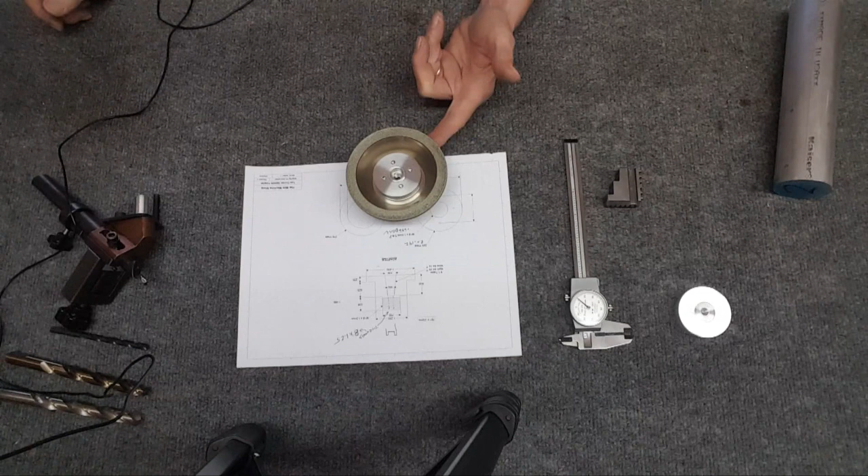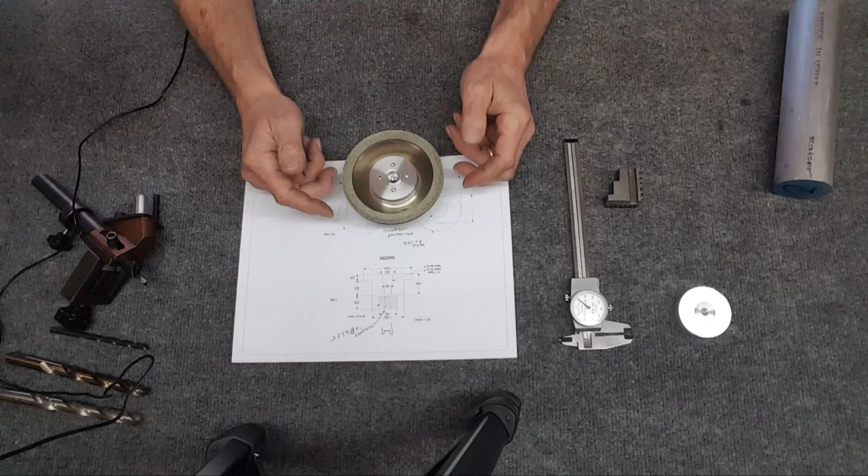Like I said in the past video, these little guys, the 100 millimeter wheels with the 20mm bore on them, hole back here, are everywhere. This is a diamond wheel, ran $20. I just found on Amazon an aluminum oxide wheel, 20mm hole, $11 prime. So the decision is I can either buy these wheels and bore them all out for 1 1/4 inches, or I can go through the painstaking process of trying to make an adapter, which this one is.

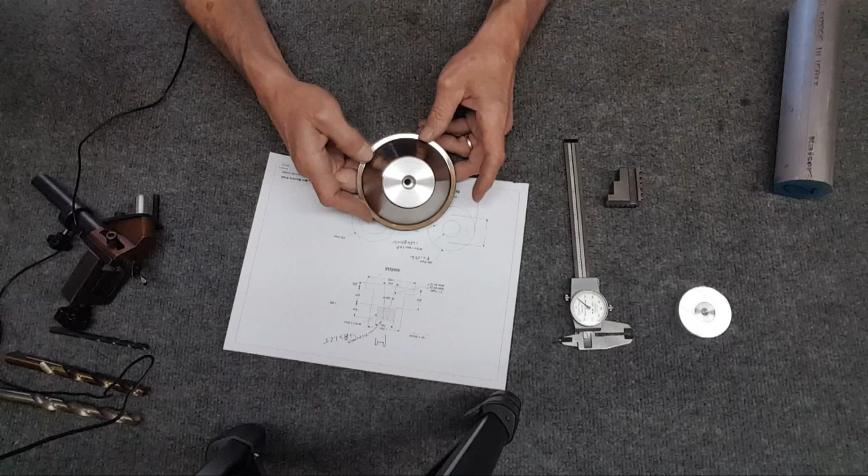What is this wheel? This is Diamond CBN, 200 grit, cubic boron nitride. If you want to take high-speed steel down, this takes it down really quick. Drill bits, as you can see - I'm not even going to get into that yet, that's a nightmare in my opinion. But a drill bit just goes right into it and disappears. No heat, doesn't turn blue. So I decided here, obviously, to try to make an adapter.

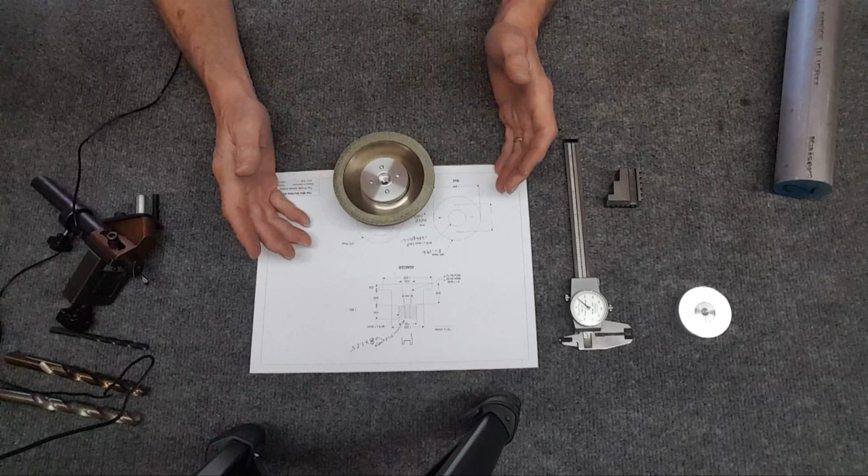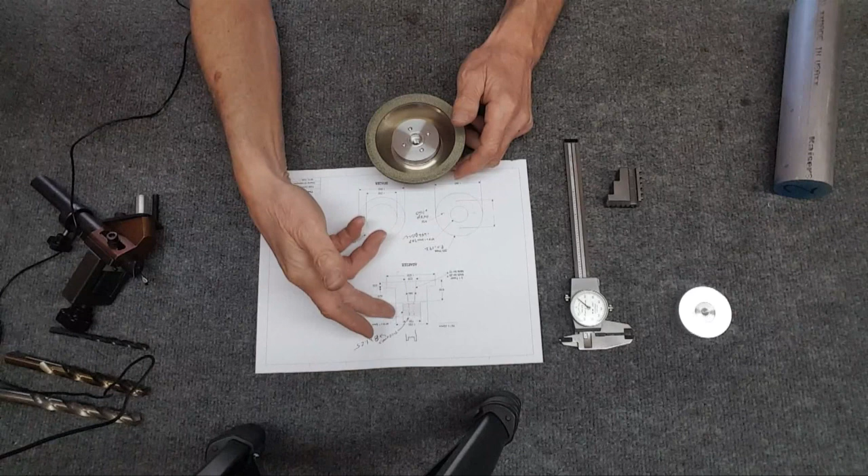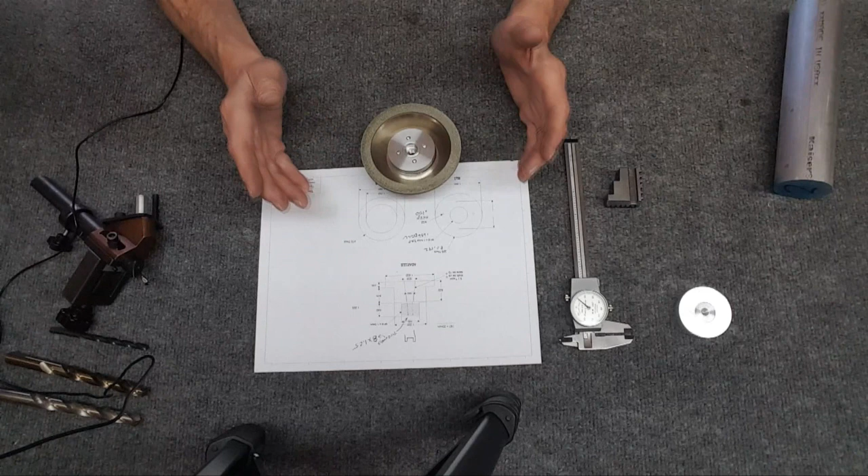The problem was I couldn't figure out how to make it in one piece. In other words, never take it out of the chuck, so I know it's absolutely true. So this one, I wound up chucking it this way and turned down this face, turned this down, turned this, threaded it. eBay had the threading die for here, 8mm, at $10, and it also had the tap to make this nut, another $10. So I'm in it like $20 for tools, but TouchDRO did a nice job in the hole circle function. That was great. So you can see I kind of added some material as I built this thing to the print. Pretty confident that the print is correct.

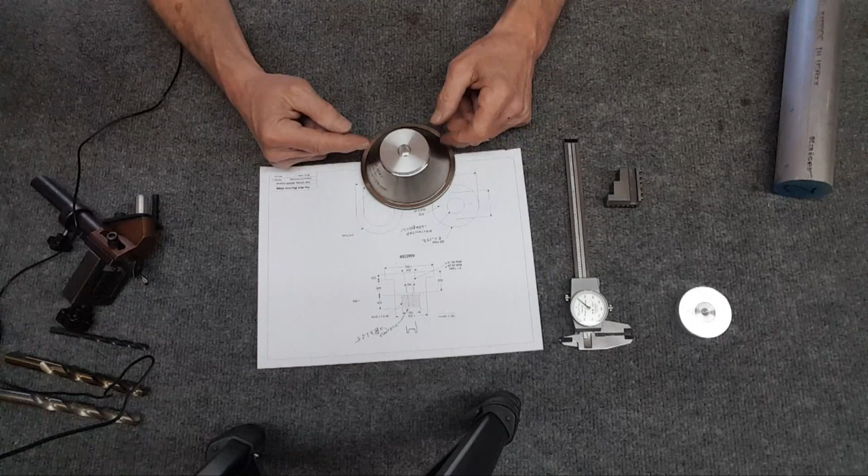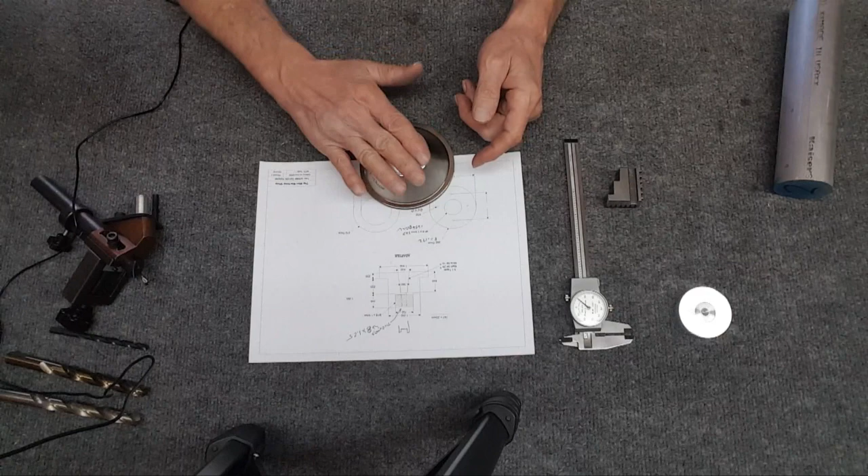Once I had this whole side done, I did take it out of the chuck, because now I've got to do this taper here and put it in my four-jaw. And the four-jaw was bought a long time ago from LMS. Yep, constant problems with it. They were sending me replacement jaws because they were all crooked. I mean, it was just a mess, and I gave up and said, all right, fine, just work with it. So using the four jaw, it was very difficult to try to get this so it doesn't have run out. Best I could do was like a couple of thousandths this way, and I think it was a thou worth of wobble. When I actually put this on the machine, I've got 3 thousandths this way, and I didn't check the other face. But it runs nicely, minimal vibration, so great.

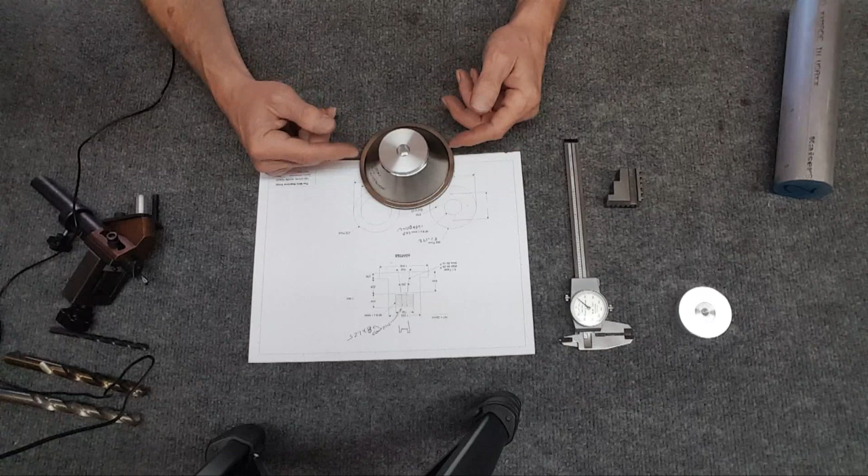So, like I said, I can either bore out all these wheels or spend the time to do this. Since this guy was pretty successful, I kept thinking, how can I do it in one piece? And I can't flip this over. And I finally came up with the idea.

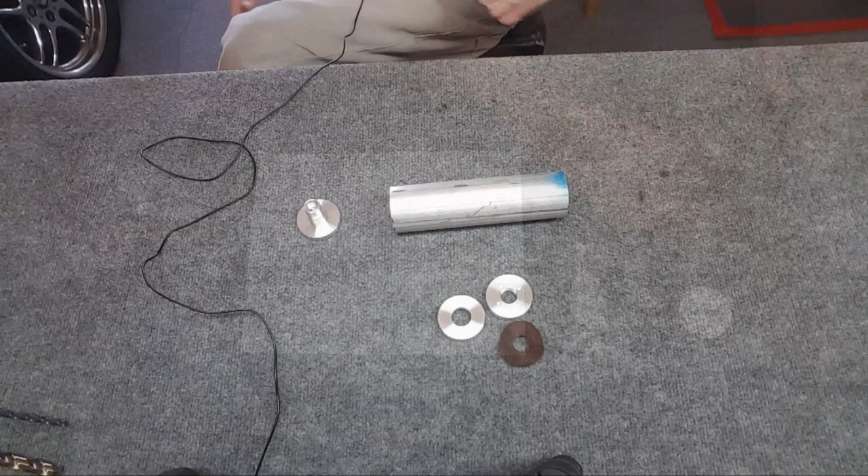What I'm going to do is waste quite a bit of nice 2-inch material, but I plan on cutting this - not here, my part, this is going to be the material for the part - but I want extra here to go into the 3-jaw chuck. So I'll cut it here, and then I'm going to turn this section down to smaller than this dimension. So what's going to happen now, if that's down, that piece goes into the chuck, so I'll actually have some clearance here. The chuck would be about here. So now I can face this, I can turn the entire thing down. Now I can come down in and I'll have some clearance because I'm going to use the power feed, and I'll have room here where I can stop the power feed before hitting the 3-jaw chuck.

I can take it down here, I can take this down. It's all in one piece, never comes out of the chuck, so I know everything is perfect, no run out, nothing. Then I can drill all the way through, bore the taper in here and everything, and then part it off when I'm done. And that little piece that's still in the chuck goes in the scrap drawer.

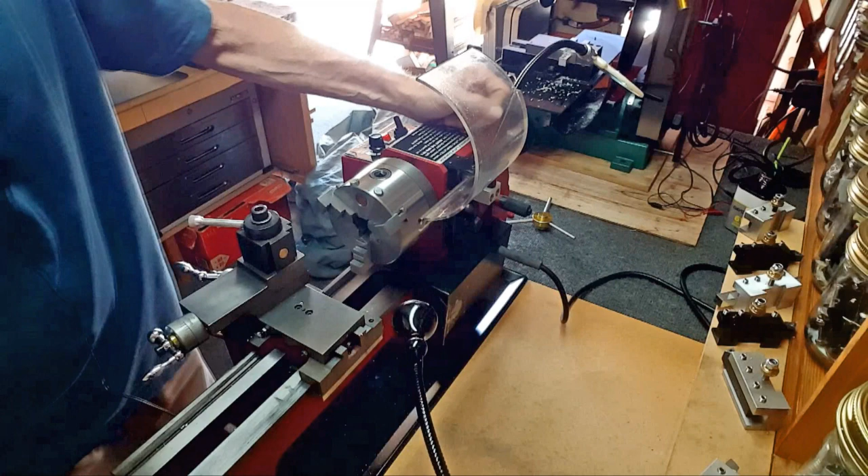Hopefully it's successful, it's the first time I've ever done anything this way. So let's go over to the bandsaw and cut this guy off. Alright, over here at the lathe, and the magnets are working out pretty good for balancing. They're not too critical, I still haven't really stuck them down, but I've moved them a couple of times.

It's not that critical where they go. You can see the compound is still angled from making that last trial run adapter. But I was setting this angle to this edge, and it dawned on me, maybe this edge is not parallel to the face. So I took the jaws out and checked this angle to the face of the chuck.

Sure enough, it's right on the money, at least something less than a tenth. So I'm all marked out here. There's the part, okay, get him in there. See if I can get it kind of straight so it's not wobbling a whole lot. Hey, that's pretty good, Dave. Yeah, that is. Alright, lock it down real good, because like I said, it's not going to come out until I'm completely done.

Oh actually, no, I'm going to be spinning it around here, right? Part. Yeah, I'm putting it in there backwards. I gotta put the part in first. This guy goes in there because this is what's going to be permanent. Watch, I won't be so lucky holding it straight. Hey, I'm lucky again, alright. Yeah, that's not really moving around. Alright, so lock it down pretty good.

That's quite a bit to be hanging out. Well, that's it, I'm down to 650 thousandths. Cleaned the machine up a little bit because it was a total wreck. So now it's time to spin it around. Boy, I gotta, yeesh man, these things are a mess. That's gotta be taken apart and cleaned.

Just stick it over there. Everything's a mess. I'm gonna take some compressed air to this thing first, but because this outer part here is going to be the threads for the nut, so I'll be able to clear that. It has to go down to 700. Yeah, it's a little warm from all that work.

Change the, wow, change the jaws out because now it's small enough that I can actually hold it in the other set of jaws. Come on out, these got to be cleaned up too.

Number 1. Yeah, have it all memorized because of that sticker. 1, 2, and 3. Is it clean in there? Yeah, it looks like nothing got in there. Nice, where's the other jaws? Here's number 1. Kind of the cool thing is it doesn't matter what slot they go in, they just need to be in order. So I can go 1, 2, 3 or 1, 2, 3, any which way I want. That's number 1, here's 2.

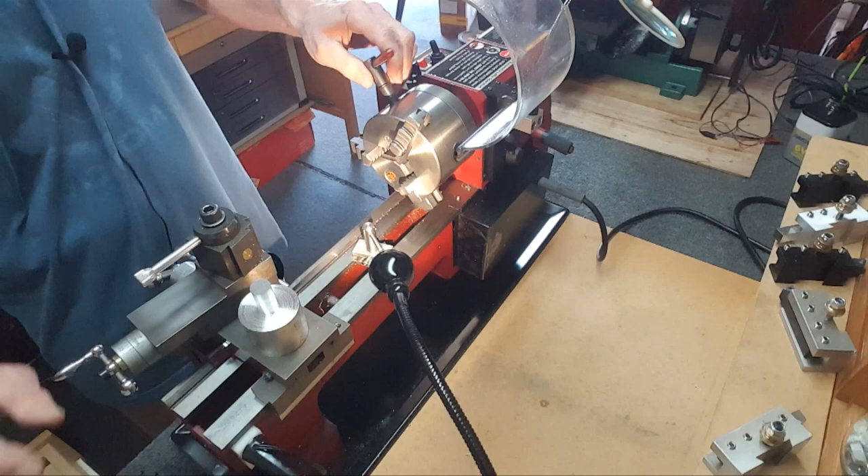So I should have plenty of clearance because the other jaws are hanging out farther. And jaw number 3. Alright, perfect. These gotta go. Yeah, I'll have lots of room. So I think, yeah, I did say I wanted 3 jaws to grab it.

Don't need this now, so he goes for a while. It's not a very steep angle, but that should work. And take it down to the main diameter. Let's see here, oh I still have power feed engaged. Take that off. Do I hear gears? No, good, no gears.

Yeesh. Well, they did a pretty bad crooked cut here coming out, huh? Downloaded some of the footage.

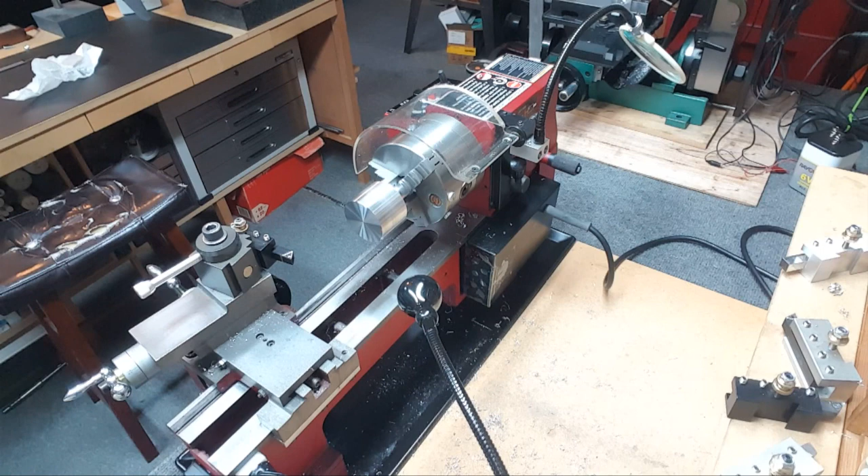Move the camera here a little bit. Watched it and realized the glare from outside is pretty bad, so I closed the door and used just the overhead lights. Pretty cool. Print said I was. Where's the print here? I'm going to need it here in a second anyway.

Alright, the print said I needed to turn this, the outside part, to 1 inch 930 thousandths. Did that, turned the whole thing, sanded that a little bit nicer. Just touched up this little section, which isn't that hot, but.

So now it's time to completely switch everything around for going the inside over. This is the first time I've ever put the saddle stop on the other side. Oh nice, I can't go back far enough, huh? Ooh boy, this is going to be a problem.

Even if I shorten it, how much do I have to go in? Let me see here. Always a problem, huh? Take this guy. Oh no, it's that, so I gotta move this in. So there's nothing else I can do here, this is the only way to do it. I gotta go in what?

Does it say? Oh yeah, because it's now 20 millimeters. The print is the 1 1/4, I gotta go into 787. Which, alright, I have to get a calculator here, figure out just if I can do this. I better be able to. Wow.

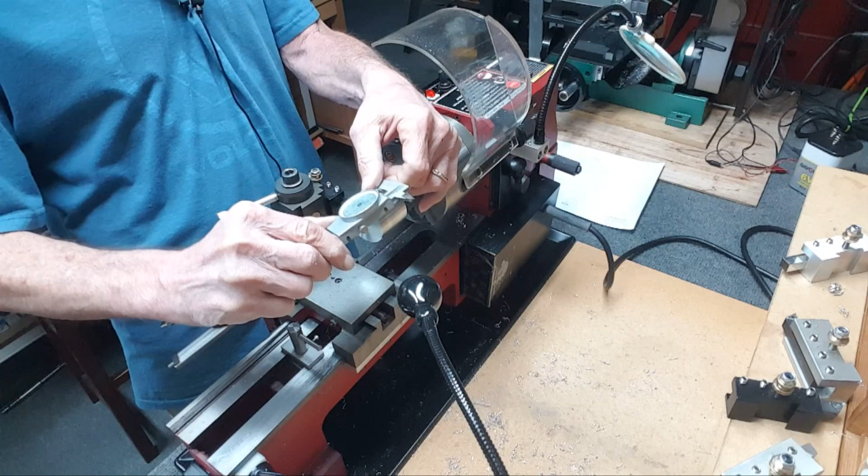235 thousandths. So I want what extra? I want 50 thou extra. So alright, where are you? 235, 285. I want 2.285. There, so I want to put the cut

Over there, and it goes up against it. I'm just going to tighten the lock on this bed. There it is, perfect, alright. So, perfect, I'm there, right? I'm there. Oh, power feed's got to go in.

Okay, and I have plenty of room. Ooh, do I? Yeah, I'm safe to stop. Here we go, huh? This will be interesting. Make sure the power feed's going to go in the right direction.

Huh? There, not moving, there it goes. Alright, so, is it really in the notch? Yeah, it is. Okay, first cut. Here we go, huh? And it's cutting it, cool.

So I gotta figure out how far I gotta go in, which is gonna be a long way. Oh well, I'm just gonna keep calipering, it's a little faster here. A little cutting fluid. Oh, this is my good one. I need to put a junk guy in here.

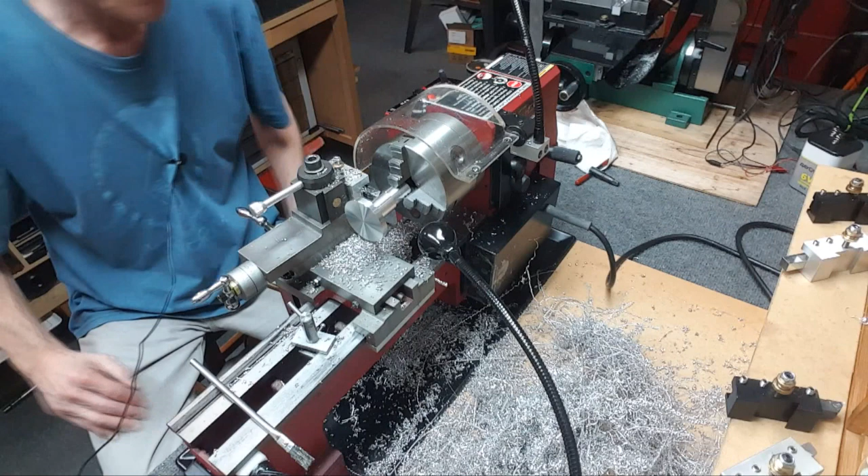Right, so I am 40 thousandths from final. And I did stop and take the cutter and move it out further so I could get in there, because I was going to start hitting this.

So I'm going to clean this complete mess up that you see, so I can be set up here for the final stuff. Go to my nice aluminum cutter, and somehow I got to figure out, I think I'm just going to angle it like crazy and then come in.

So I'll bring you back for the rest. Well, sorry, battery, is this better off? Probably. Battery went dead, takes 2.5 hours to charge it, and I really wanted to keep going on this thing.

So I've got this to thickness now, to the print. This guy, I've measured a lot of the wheels, and they're all oversized by a bit. So I am a half a thou under 20 millimeters. So, 0.7865. This guy's turned down.

It's ready for threading on here. Broke these edges a bit. So I want to come in, and once I'm done with this boring, relieve this for threading. So I use the parting tool or whatever.

The original one, first one I made, I did 84.1. The math says it's supposed to be 84.4, so I'm gonna take a chance. I'm at 0.4, and I'm doing it with this guy here. He just simply goes against this edge here and right up against the work, which is clean. Boom, there I am, 84.4.

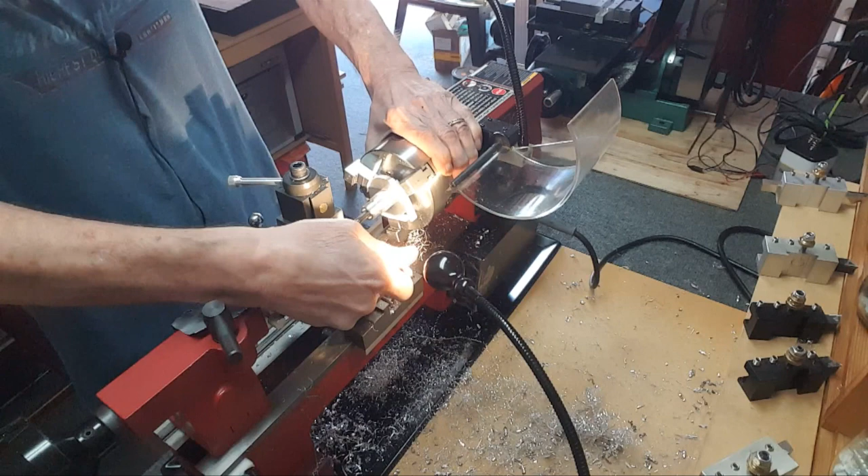But it's not really to the big part of the threads yet. Actually, the first one, I used a drill bit that was in the drawer, and it was just a little bit smaller than it should have been. I looked up on the internet what I was supposed to use as far as a fractional, and turns out it's bigger, like a few thou, but yeah, this is going pretty nice.

Take it out, clear the chips, or just keep going. That's getting tough. I'm gonna clear it. I don't want messed up threads here, you know. Alright, relieve this guy. And back it out by hand.

Yeah, it comes out. But I'm using that aluminum tapping fluid. And that stuff, like I said, the chips are completely different. Wow, look at that, plugged up. Air, clean it off.

Alright, and the fluid, I don't want this sucker drowned. Oh, these threads look gorgeous in there. Alright, I want it all over these threads. There we go. Stick them back in there.

Pressure back on it. Hold it dead center. Put a little bit more push on it. And this should be the final then. Yep, there it hit.

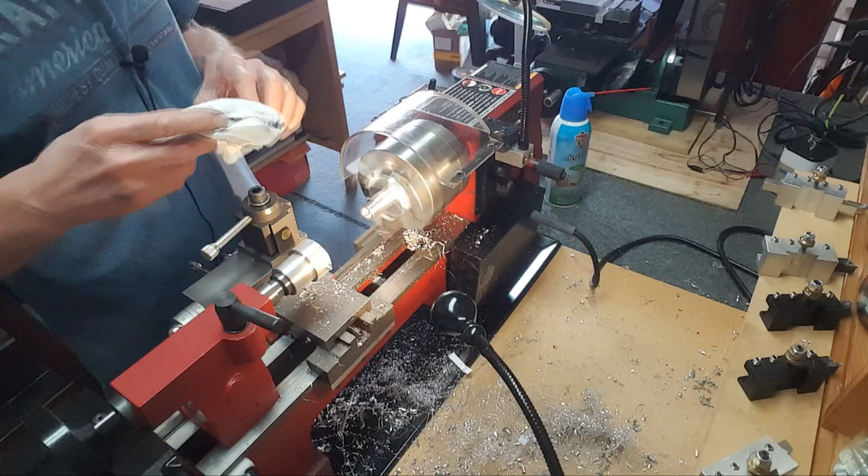Clean the threads up a little bit, reverse on, and get it in there. Oh yeah, they're a wreck. Too fast. Wobbling around a bit.

Yeah, they're soaking with this cutting fluid. Slow that down more. There we go. Now I'm getting it out. So that's basically it, man.

Do have to clean that up, but the nut should go right on there. I might want to clean this edge up a little bit too. Where's the nut? There it is.

Put the mic down for a second. Alright, I'm back. Did you miss me? No. Alright, so this should go on.

Come on, get on there. Yep, there we go, all the way down. Beautiful, works. That doesn't look too bad. That's not wobbling. Yeah, it wobbles a little bit, but there's enough play in the threads that it should work fine.

So this should be done other than cleaning that up. Turn it around, the inside's fine. I just got to do a little bit of cleanup here and I'll be done. Alright, pretty good success.

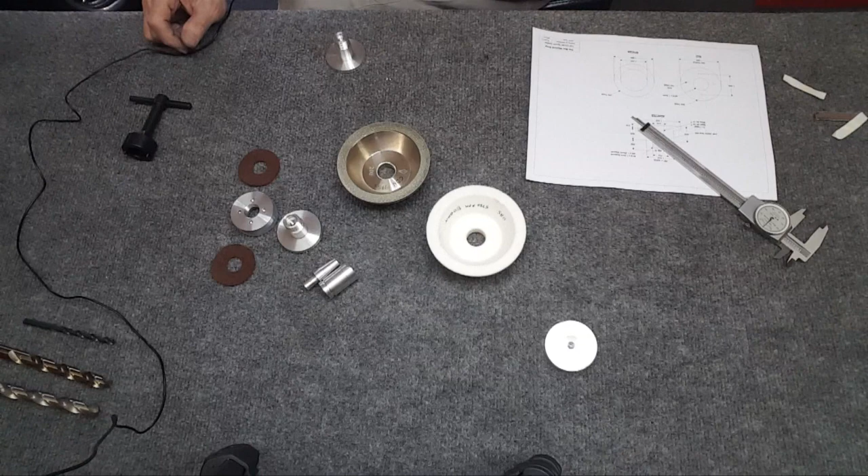I guess first up, this is the $11 wheel from Amazon. Came in, it's meant for high-speed steel, 5,730 RPM, 80 grit. Not as great, the edges are kind of a mess. Inside too, but I'll dress this off. That is an oversized hole.

This is the first one that I made, so this one's going to be dedicated to this wheel, because since this wobbles—or not wobbles, has a little bit of run out—I can center this wheel up and leave that dedicated to it. So that's done.

This guy is the one you just saw making. Well, that was a pain. Did try it on the machine and it fits perfect. So 84.4 degrees works. This one I'm going to dedicate to all these steel kind of wheels, since I haven't checked the run out, but it fits right on that sucker too. So yeah, you can see, just got to jiggle it to get it in and out.

So I got to make another spacer, which I'll do for both of these, and another nut, but I had to make my own little felt guys here. So this works great. I already had it on that wheel and it clamps right down on it. So I'm done with this guy. Consider this project a success.

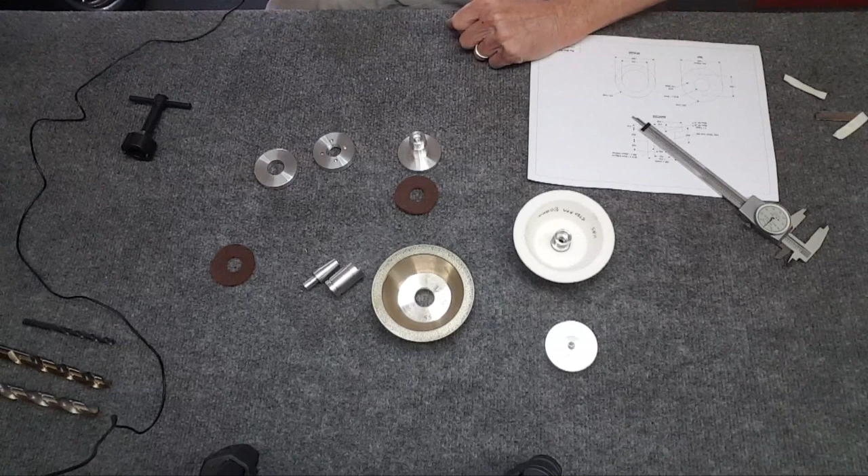So this should have 0 run out and 0 wobble, since it was all done in one piece. So I think I'm the only one on this planet with a Shars machine that takes 1 1/4 inch grinding wheels, now takes 20mm wheels. So if you guys want to dive into it, have at it.

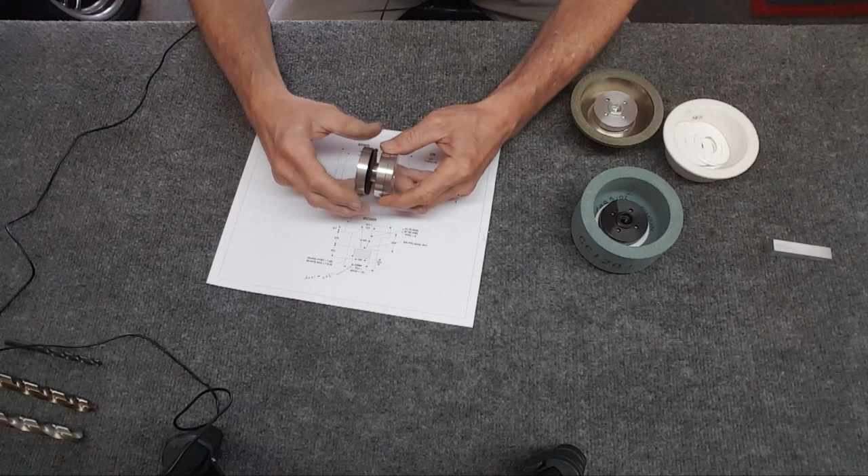In closing, this is the second one. This is the one you saw being made. I didn't show doing the nut part here and the spacer and things, because I think the body is mainly the hard part to do, and it came out perfect.

And before everybody climbs on me about aluminum, I talked to an engineer at Norton Abrasives, and he said for the size of this wheel, this is fine. When you get up to around 20-inch wheels, you may want to consider steel because of thermal expansion. Also, there's not going to be wear, because this is going to go on the wheel and stay there. It's not coming off once I have it balanced and run out down, so dressed off.

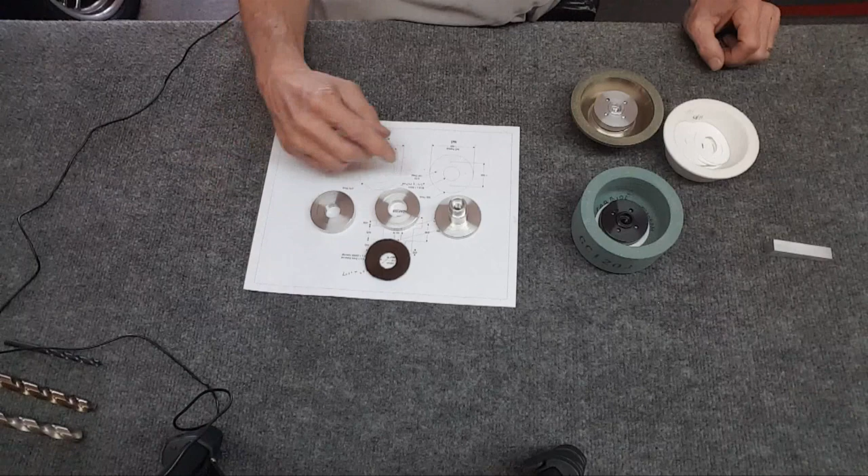So bottom line, if you buy the U2, you're going to get the adapter that goes for 20mm. You cannot find these adapters anyplace, so you'll be, just like Stefan Gotteswinter, making your own adapters. I'm not sure if you buy the 1 1/4 inch adapter from Shars whether it fits the U2. And the U2, you're also going to be running, I think it was 3,400 RPM. If you buy the Shars machine, you'll be running at 5,000 RPM, and you can buy extra 1 1/4 bore adapters. And then if you want to go for 20mm like me, you make your own.

I'm close enough with the print, I can release it. If anybody's interested in the dimensions here, they're working, still not 100% sure about this taper here. I'm looking at taper reamers and stuff, but that's another project.

A couple things to note: these wheels do not come with the blotters, so I had bought a paper cutter a long time ago to make my own blotters. You can see it's on this wheel, both sides of it. So that's important. Talk to Norton Abrasives and they explain—oh yeah, Norton Abrasives has their own YouTube channel, go and watch the stuff. They actually explain why you need these things on your wheels.